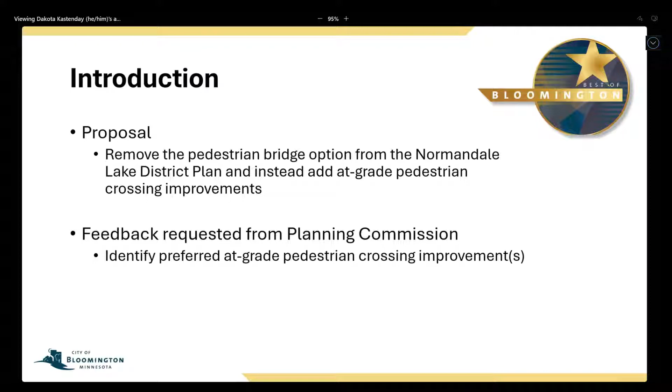Bolton and Menk has prepared 3 alternatives that we are looking for feedback on from the Planning Commission today. So with that, I will pass it over to Mike Larson from Bolton and Menk to discuss the study further and the alternatives. Thank you, Jeremy.

As Jeremy mentioned, our study really does focus on what can we do to this intersection to make it feel safer, feel more comfortable to pedestrians. The purpose of this is there's a direct need today at this intersection and on both corridors, as we've got surrounding land uses conducive to pedestrian generated activities, with businesses on the northwest side, the commercial areas, restaurants on the northeast side, and then the parklands and significant trail networks south of the intersection and along both roadways.

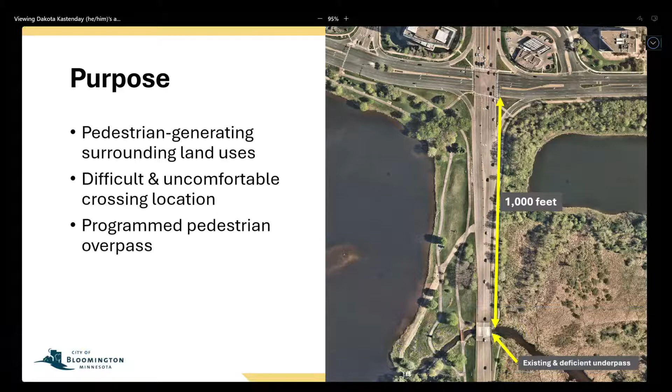84th Street is designated as a priority corridor as part of the city's active transportation action plan. So we know there's a plan here, there needs to be a plan here, and it is a priority location. Because of the intersection's location, its proximity to the major highways just north of here, and the size of the intersection, it is a difficult and uncomfortable location for pedestrians to cross. As Jeremy mentioned, we do have that programmed pedestrian bridge or overpass, but we're looking at more feasible at-grade alternatives that might be a bit less impactful.

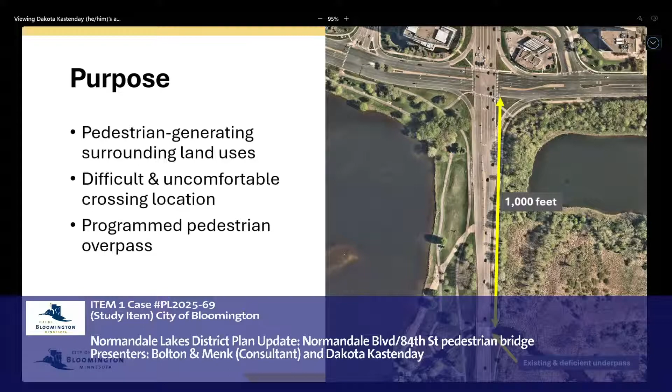So staff directed us to first take a high level look at the pedestrian bridge recommendation. What might that look like? What might it cost? What challenges might need to be overcome with a project like that?

The figure on the left shows 2 potential alignments on what that route might look like. We don't have a recommendation on one over the other at this point, but what you'll notice is that both alignments take pedestrians and bicyclists significantly out of the way of an east-west movement along 84th Street. And what we know about pedestrian bridges, underpasses, things like that, the more you increase the travel time and distance that a pedestrian has to make to get from point A to point B, the less likely they are to use it. So there are challenges with this.

We estimate a structure like this might cost in the realm of $5 million. So it is a significant investment. That cost could increase. We're in a slightly risky area with the vegetation, the water bodies on both sides of the south leg of the intersection. There's a high potential for poor soils, other challenges that might need to be mitigated that might make that cost go up.

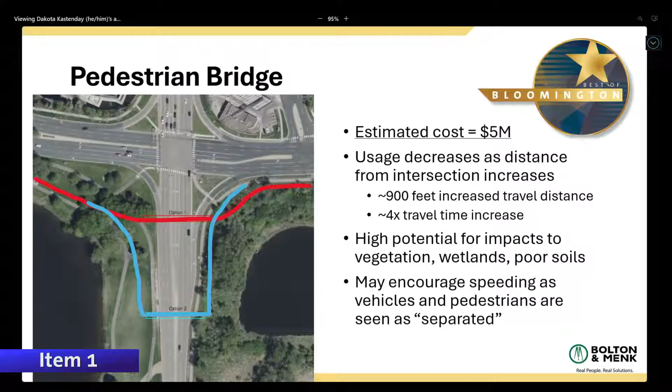I think the most important point on this slide is that last one about context. When you think about this intersection, Highway 100 is the north leg, a freeway facility clearly designated for vehicles, with pedestrian overpasses all along it. If we construct a similar pedestrian overpass on the south leg, it may feel like an extension of Highway 100. We might see higher speeds as people come off the freeway and travel into town on Normandale Boulevard, so that illusion of separation could have negative impacts further south.

So as part of our study, our first step is taking stock of how the intersection operates today, as far as how it functions for vehicles and pedestrians, the crash history, and things like that.

A really key thing to know about this intersection is that it's probably the highest volume intersection in the city, excluding some of the interchanges on 494 and the surrounding freeways, because that north leg is the end of Highway 100. We see over 32,000 vehicles per day across that leg, with a lot of traffic wanting to reach those freeway destinations.

Opposite of that, we still see a good amount of pedestrian activity here. In one day, we saw over 200 pedestrians crossing this intersection over 24 hours. Just over half of those crossed the north leg, which is slightly interesting — it's the highest volume vehicle leg, but pedestrians want the fastest path from the business park on the northwest corner to the gas station and restaurants on the northeast side.

As far as delays go at this intersection, it actually operates pretty well, granted all the traffic pushed through here during peak hours. We do have some failing movements, and some congestion during rush hours, but generally it functions well. We do have some queues for left turn lanes that might exceed storage capacity periodically during peaks, but it operates quite acceptably.

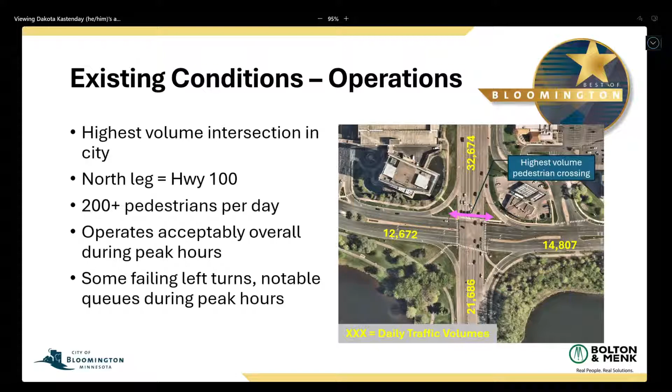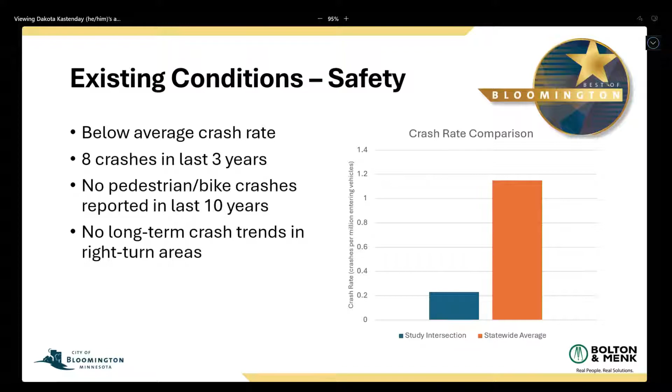As far as crash history at this intersection, it's all very good news. The crash rate here is significantly less than the average crash rate for signalized intersections across the state. We've only seen 8 crashes at the intersection over the last 3 years, and over a full 10-year history, we haven't seen any pedestrian or bike crashes. We haven't seen any identifiable crash trends due to the low volume of crashes, and those high-speed right turn areas also don't have any significant crash trends. So while the intersection might feel unsafe, it is operating nominally safe.

So getting to the good stuff — some of the alternatives we're looking at here. All of these are long-term alternatives where we're reconstructing portions of the intersection, moving curb lines, taking away lanes, and things like that.

Our first alternative is left turn lane reductions on 2 of the legs. Going back to the high volume of traffic here, when trying to improve pedestrian comfort and safety, usually the easiest way is to make the intersection smaller. Because of the sheer volume of traffic, that's really difficult to do. So what we're looking at are the 2 lowest volume movements at the intersection: the northbound left turn and the westbound left turn.

Both of those have double left turn lanes today. This concept would propose removing one of those left turn lanes to create a single left turn lane, which would take away one lane a pedestrian would have to cross, and create a large center refuge island to make that space more comfortable. In addition, we'd also take away 2 through lanes across the east leg to make that crossing a little shorter as well.

Advantages of this concept: we decrease the crossing exposures on those 2 legs, and we have large refuge islands on those legs as well. Compared to the other 2 alternatives, this is the least impactful and least expensive of the 3.

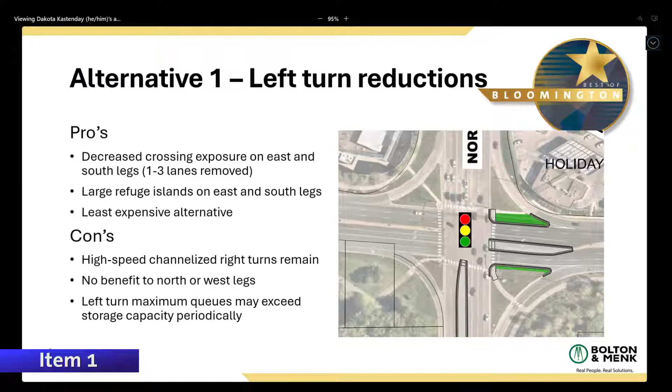Our second alternative is a bit more aggressive in reconstructing the right turn lane areas with a more modern design called a low entry angle right turn lane. The big difference between these and what's out there today: you'll notice they're much smaller, the radius is much tighter, and the angle at which they meet the cross street is much lower.

That's got two impacts on how vehicles travel through there. One, because that angle is so much lower, you cannot drive through that turn lane at such a high rate of speed like you can today.

The other impact of that low entry angle is now when you're getting to that yield point or merge point, you're not looking over your shoulder to see traffic oncoming and finding your gap. You're more straight on, your field of vision is more along the path of your vehicle. So what that does is it forces the driver to actually see and visualize that pedestrian crossing rather than looking over your shoulder to see oncoming traffic.

So benefits there: we've got reduced travel speeds and improved sight lines in those right turn areas. We do reduce the crossing distance on the east and west legs by removing that northernmost westbound through lane. And because this concept isn't actually taking away any travel lanes, we're just changing geometry, we're maintaining the amount of throughput that this intersection has. We're not impacting delay and performance very much at all.

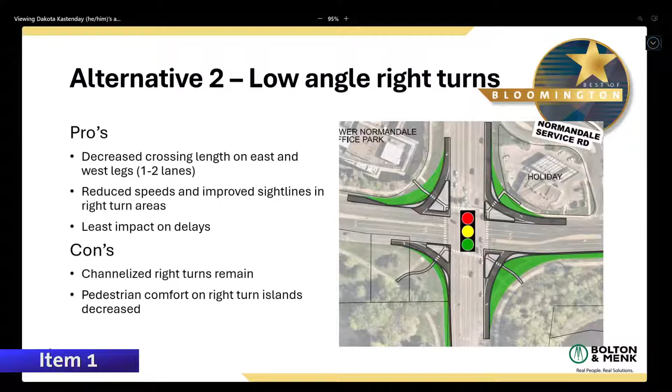Our last alternative here is a modification of the second alternative where the northern half of the intersection remains the same as alternative 2, but in the southern half we replace those right turn lanes with a more traditional design where the right turn lane would be adjacent to the through lane.

The biggest advantage here is now right turn lanes have to obey the traffic signal rather than a yield sign. So that gives our engineers the most amount of tools in our arsenal to control those right turners, whether that be with signal phases and signal timings or with no right turn on red signage, things of that nature. So it opens up the door to do more things as far as pedestrian safety at the signal.

The traditional turn lane design on that southern half also best accommodates a future cycle track or bike trail on that leg, as bikes now can just make that crossing in one fluid movement rather than three separate movements.

Drawbacks of this one: we're actually making the crossing distance longer on the west and south leg. So the impacts of that are I now have to cross more lanes of traffic, and I have to go a farther distance. And because I'm going a farther distance, the duration of the walk sign has to be longer. So that impacts the delay and the performance of the whole signal system.

We do still have the right turn lanes, those channelized ones, on the northern half. And the traditional right turn lane design has slightly less capacity than the channelized right turn design. So where that gets problematic is on that eastbound right turn lane.

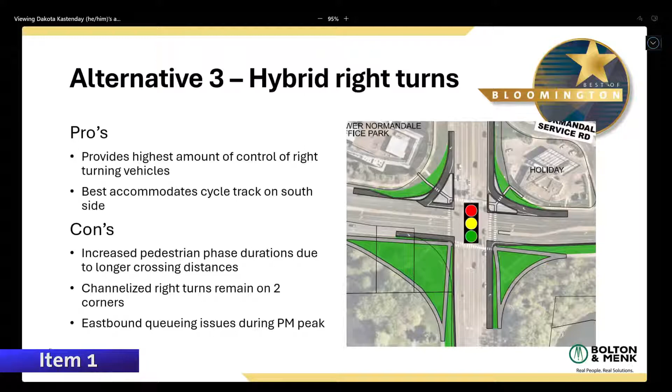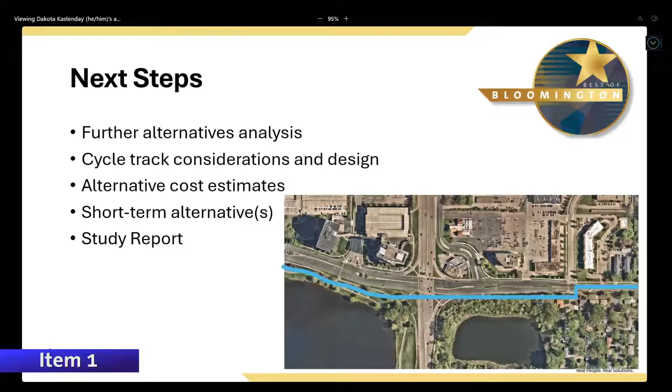So next steps with our study: we'll further refine our alternatives, make tweaks here and there. We'll take a step back and look at more of an 84th Street corridor context as far as how a future cycle track or bike trail works with these alternatives. We'll look at where to cross people over to make sure they're using that southern crossing, since that's probably the preferred location for an east-west movement. We'll generate a few alternative cost estimates for the various alternatives to give a sense of what these might take to build. We'll also look at potential short-term alternatives like striping.

Striping, signage, low cost—things that can be implemented in the near term to get us from now to that long-term alternative. And then the last part will be wrapping it all up with the study report to summarize the findings.

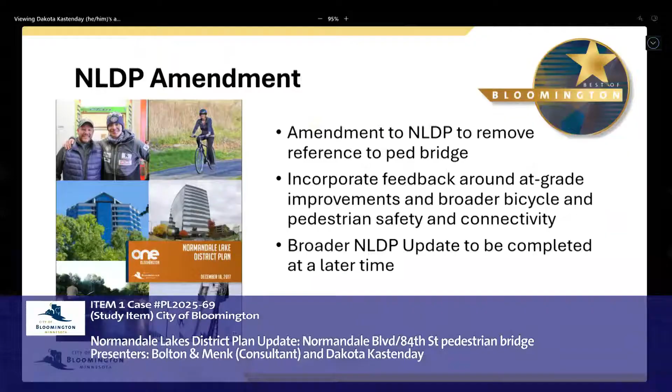I just have a final slide here to summarize some additional context or steps with this process. As mentioned, staff felt like the pedestrian bridge proposal didn't quite meet a cost-benefit analysis to implement, so that's why we're looking at these at-grade alternatives.

But because it's identified in our Normandale Lake District Plan to have a pedestrian bridge, the city has continued to plan for that in its CIP. Planning staff ultimately determined that for the city to stop programming it in the CIP, we needed to remove the reference in the plan. Depending on your feedback tonight and the council's feedback, the idea is to remove any references to the pedestrian bridge in the plan and amend it to incorporate broader guidelines around at-grade improvements related to bicycle and pedestrian safety and connectivity.

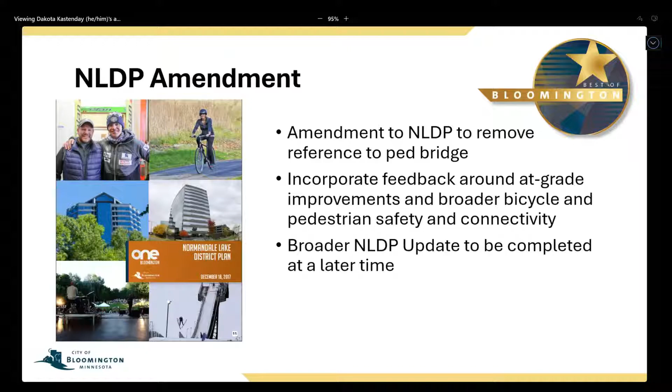We also plan, on the 2025 work plan, to have a broader discussion around the Normandale Lake District Plan and do another update to see where we're at. But because of the CIP timeline starting this fall, it didn't quite align to do this as part of the broader update, so we're going to bring that at a different time.

For the purposes of tonight, or when you see this again at a future meeting, it's really to help frame the discussion. We are just talking about this intersection and pedestrian and bicycle improvements, not so much the broader changes in the Normandale Lake District—that will be a separate conversation later on. That's also some of the reasons why you're seeing this tonight, and we're looking for your feedback.

So we do have some open-ended questions for discussion around each alternative, but I wanted to open it up in case anyone had any clarifying questions for staff or the consultant before we dive into that.

Excellent, thank you. I have some questions, but anyone else have any questions? Who wants to go first? Commissioner Cookton—oh, that was me, go first.

Okay, my first question is related to bus traffic. What does bus traffic look like at this intersection? And is there any shoulder usage by buses in this area during peak times?

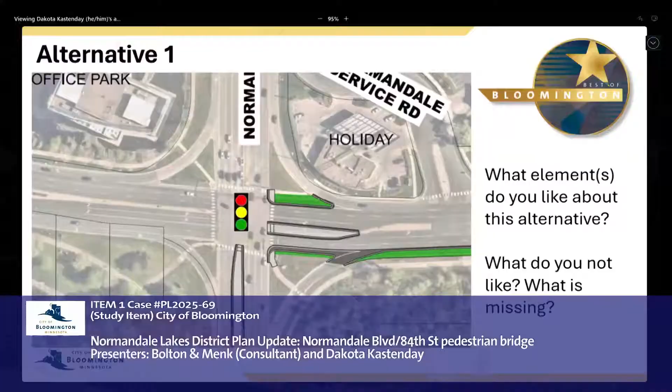Any additional questions before we get into their questions? We're ready for your questions. All right, sounds good. So we just had general open-ended questions for each alternative, and the questions are the same for each. We'll start with the first alternative, and it's really getting some feedback on the elements that you like about this alternative and maybe what you don't like or what you think is missing, and we'll do that for each one just to help give us some direction.

So this first alternative, like it was mentioned, reduces a left turn lane on 2 of the segments to then install median refuge islands on 2 of those segments.

Can I ask another question? Yeah. Based on what I'm hearing, zero bike-ped issues in the last 10 years. Now, have there been issues? Maybe. Crashes: 0. An overall of 8 crashes. Seems like a bit of a small problem. Are there other alternatives? I'm thinking of things that get the driver's attention more readily, like flashing lights, though maybe there's too much traffic volume here for those lights to be effective. But I'm thinking about other places where the lights are on and there's a pedestrian around. Is that something that's feasible here?

Yeah, so you don't typically see flashing beacons at signal systems. It's usually one or the other. Those flashing beacons are typically for mid-block crossings or uncontrolled crossings, but here where we have a traffic signal, that's the overriding traffic control device. We could look at those beacons on the channelized right turn lanes, since that's technically an uncontrolled crossing area, but we'd be careful to avoid setting precedent on putting those everywhere. It is certainly a special case in that we have such a high volume on those areas, so it's something we're considering.

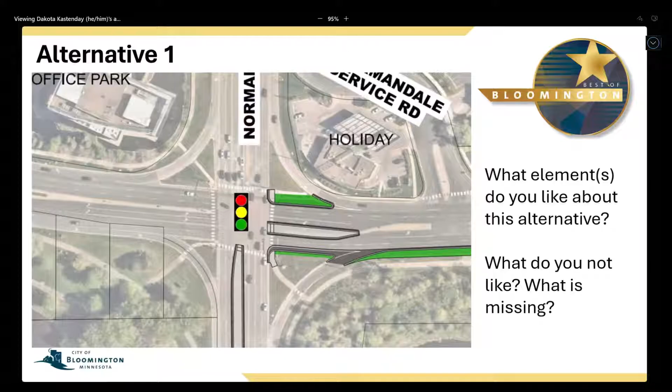Okay, and then last comment, if you don't mind. Go for it, Madam Chair. Yes - overall, obviously looking at the safety history, if it's been pretty safe, relatively safe, I wouldn't support changing it. I think it's unnecessary in my opinion. I know there's people who have concerns, maybe pedestrians, who express safety concerns, which I understand, but I just think spending money unnecessarily when we don't need to is maybe not wise. That's my personal opinion, as a city, but yeah, thank you.

Commissioner Cookton: Thanks, Madam Chair. So I have some just kind of general comments, thoughts about everything. I used to live in this neighborhood for a couple of years. I would avoid this intersection. There's a pedestrian bridge just north of the image here that crosses over Normandale. That was a lot safer way to get over to the office park and down into the park - to take what I believe is actually American Boulevard, that bridge that crosses over Normandale. So that's a certainly more comfortable place to cross than this, but I can understand why people do cross here if you're working in the office park or whatever, and obviously the data supports that people are crossing here.

I asked the question of whether doing nothing is an option. I don't necessarily support doing nothing. Safety is such a hard thing because it's easy to say we don't need to do that until something bad happens, and you're going, oh my God, why didn't we do something? Safety is such a hard thing where you're trying to protect against the future, and you don't know something bad's going to happen, but you're trying to do what's prudent to keep it safe so nothing bad does happen. So it's a very nuanced and complicated thing.

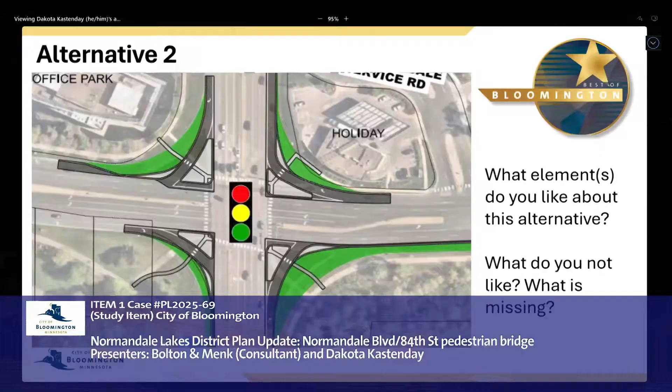Yeah, again, it's a similar question. I guess maybe another way to think about it is how you feel about these low-angle channelized right turns versus the kind of existing channelized right turn lanes that are out there today. So that's really the main change here with this alternative, if you have any thoughts on that element of having a low-angle entry compared to what's out there today.

Commissioner Cookton: I think one of the things, Madam Chair, I was most surprised by in the staff report we received and from the consultant, was that there haven't been more accidents going westbound on 84th to northbound on Normandale, that very fast. And then you have to merge there going pretty high speed as people are speeding up, getting onto what turns into be 100. So I do think this design would certainly make that safer because it's so available today that people think they can just merge, and people are going pretty darn fast getting ready to get on to what is 100.

So I do like this from that standpoint, but that's a traffic question. It's not really a pedestrian thing. So I don't know, again, I think I like this. I didn't love any of the options, to be honest with you. I was really hoping to see something where there was a refuge island on every movement, every pedestrian movement. But it sounds like that's not an engineering accomplishment that can be made here. So we're kind of dealing with what we've got.

Any other thoughts on this alternative? This feels okay. I like the geometry of it, but I do appreciate Commissioner Cookton's thoughts about not being a traffic engineer, because I am not a traffic engineer. I'm not even an engineer, so I don't know anything about this field. I think that slowing down the traffic in these channelized right turns is a good thing, regardless of whether the goal is to increase safety or to slow down traffic generally. It feels like the goal here is to slow down the traffic, which then, I guess, increases safety for a pedestrian. But I think the idea of crossing at a free right for a pedestrian is not an ideal scenario, regardless of what the geometry is, in my thought.

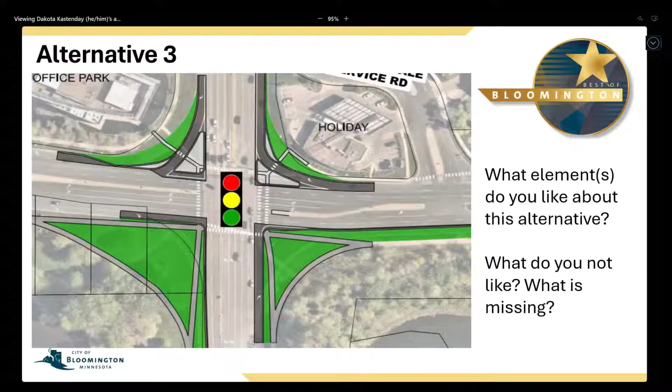Commissioner McGovern: When we talk about traffic safety and pedestrian bicycle safety, I think this one is not good. Cutting off those turn lanes and making it an actual stop takes the focus off of looking for people, because you're looking at traffic coming towards you. I can't wrap my head around this one. I don't like it.

Commissioner Cookton: Thanks, Madam Chair. I also have some reservations. Again, I don't feel super strongly about any of these, but adding a lane seems like kind of a step backwards here. I think what we could accomplish with alternative number 2 is kind of better than this, but I really hate to use words like better because that's unfair of me to say that.

Commissioner Issa: Thank you, Madam Chair. I guess this is just more overall, kind of adding to what I was saying earlier. If we have, let's say, data on the past, I believe it was 10 years, and it showed no major incidents with pedestrians or bicyclists, that is, if we were to change this, I know our intention is to improve safety, but what if it did the opposite? At least with what it is currently, we know how it was operating in terms of safety. But what if there's unintended consequences, or things that happen? My main point is the way it's set up now, we know there hasn't been major safety incidents. And so if we did invest and change this, follow the city plan to the T, maybe 10 years from now it does improve more, but maybe also it could not, you know? So with one we have prior history and with the other we don't, but obviously everybody has good intent, so that's kind of my overall standing.